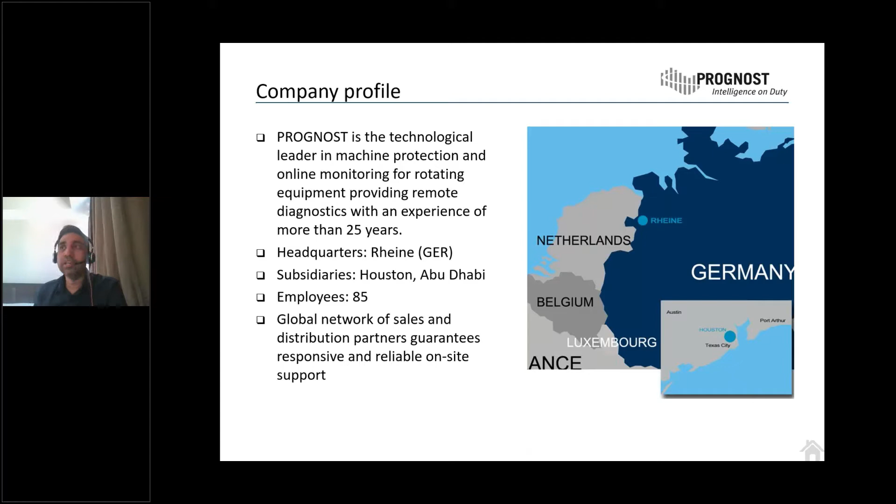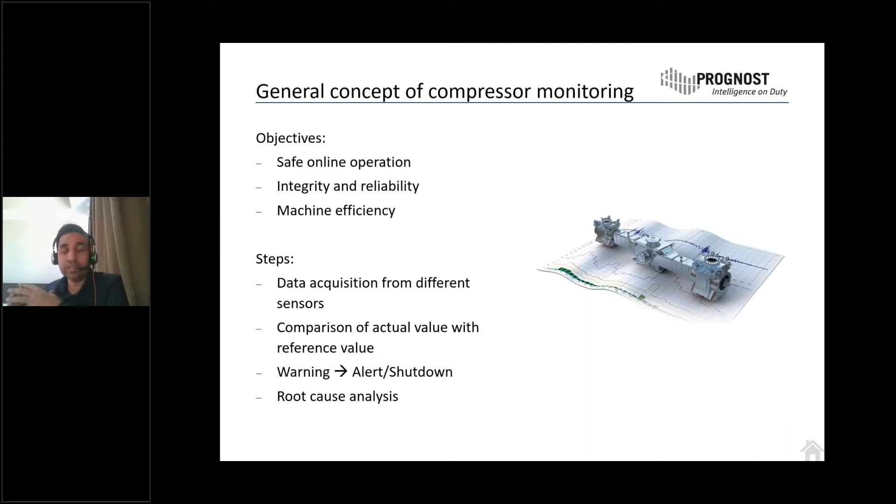In the past, we usually didn't give much importance to recip monitoring. I've seen a lot of plants in Canada or globally where people just say, okay, putting one sensor on the frame vibration helps protect the machine. But this is not true to that extent.

The thing is, you put a velocity sensor on the frame and get a trip—a vibration switch giving a trip. But vibration velocity is the last thing to get influenced when something is going wrong in the crosshead or in the valves. We'll learn this part in later slides, but the point is you may not be able to avoid secondary failure or secondary damage in the machine with the velocity sensor.

You may get a trip, but may not achieve the function of the system. If you're putting a condition monitoring system on your machine with just a vibration switch, you may not be able to avoid secondary damages in the system, and you may not be able to locate exactly where the fault lies in the recip machinery.

People just focus on rotating machines being more important than recip, but at least in the upstream or in plants with services like hydrogen and ethylene, these machines become critical from a safety point of view. So in that case too, you need to put the right system and the right number of sensors on your machines.

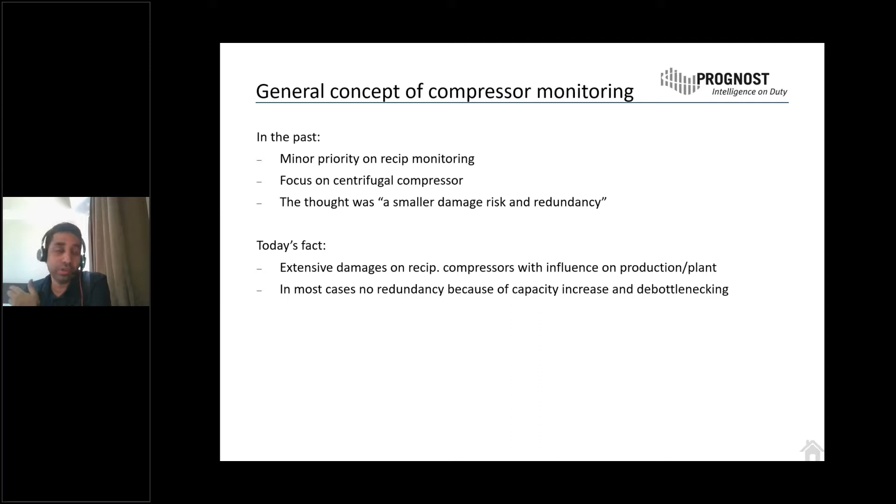But people are getting more aware, and they're trying to put sensors at the right location, taking advantage of the technology existing in the industry. And sometimes when you don't have redundancy in the system, you're also putting a condition monitoring or safety system on your machines.

So here we're talking about the three-concept theory of the MMS system you may use in your plant: a protection system, and the protection system further provides data to the condition monitoring software. And now with emerging technology, you do auto diagnostics on that particular data, like machine learning, AI algorithms, digital twin—all of this you can do on the data if you have it.

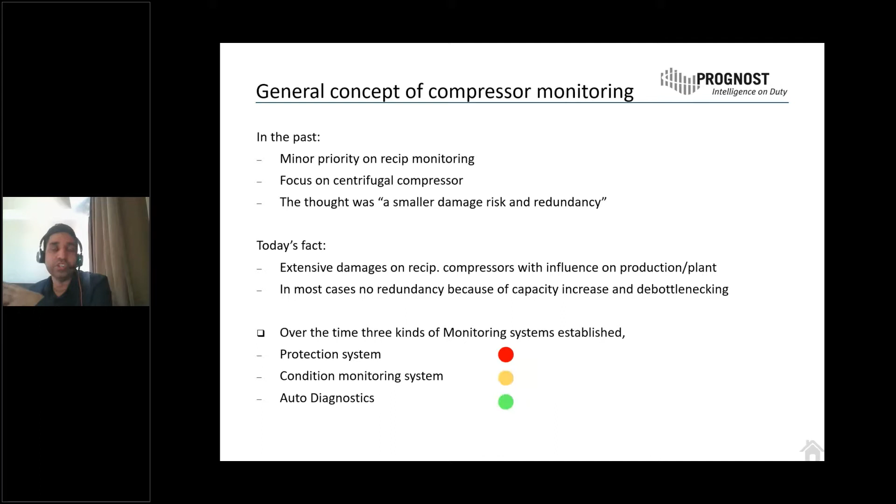But if you don't have correct data, you can't achieve either condition monitoring or auto diagnostic functionality. You may trip the machine, you may protect it, but at least you're not able to achieve the function of doing root cause analysis to understand what's going on in the system.

So coming to this concept of condition monitoring: one part is a protection rack, which you use as a data acquisition system. The sensor is placed on the machine, and these sensors give the signal to the input card integrated in this rack. This rack performs the tripping functionality or safety system.

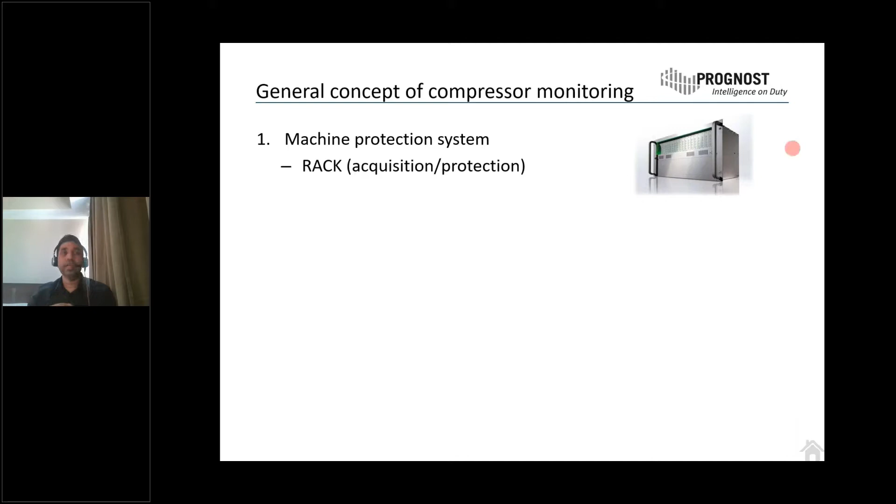And then this safety system further gives a stream of data to the condition monitoring software. This software will process the data, and you apply different algorithms and statistics to give tools to analyze the data in an effective way.

After that, in this software, we now have machine learning algorithms. So you just put the system on your machine, make the machine learn, and subsequently all the work would be done by the system itself.

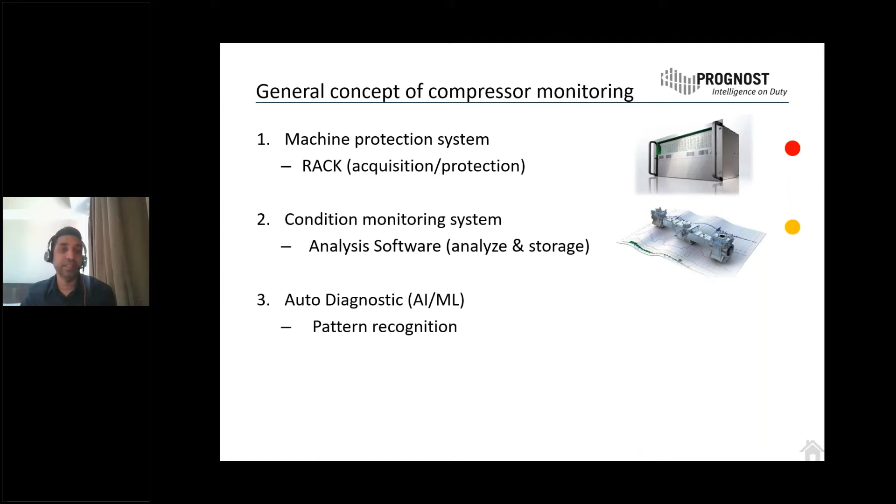In the Prognost system, we call it pattern recognition—whenever there's a situation where you've had a failure in the past, the system will recognize this failure and will notify you beforehand with a probability.

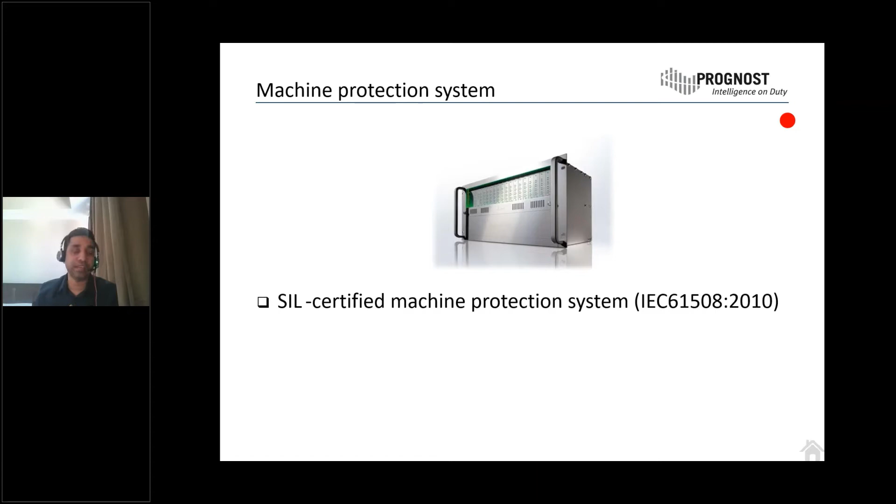This is the rack, and the rack should be certified. In some industries, we call it SIL 1, SIL 2, SIL 3 - whichever certification of the SIL you want to put in, as per your standards or as per IEC standards. Then the system will issue you a shutdown, alert, or unsafe.

Basically, when we talk about SIL, what exactly does SIL mean in brief? Maybe some of you in the presentation already know what SIL is, but I just want to give you a brief introduction. So SIL is Safety Integrity Level.

It means like if I have a sensor on the machine, and this sensor is connected to a wire, and then this wire goes to the junction box, and from the junction box it goes to the connectors and then connected to the data acquisition rack. From the data acquisition rack there is a data acquisition card, and then from the data acquisition card it goes to the protection card. This is the flow of the signal from the sensor to the protection card, which ultimately trips the machine.

So the basic aim of SIL is that the system should be capable enough to detect any loop issue or connection issue in the complete signal line, so that the system does not trip due to a false alarm condition. Instead, the system will issue you an unsafe signal.

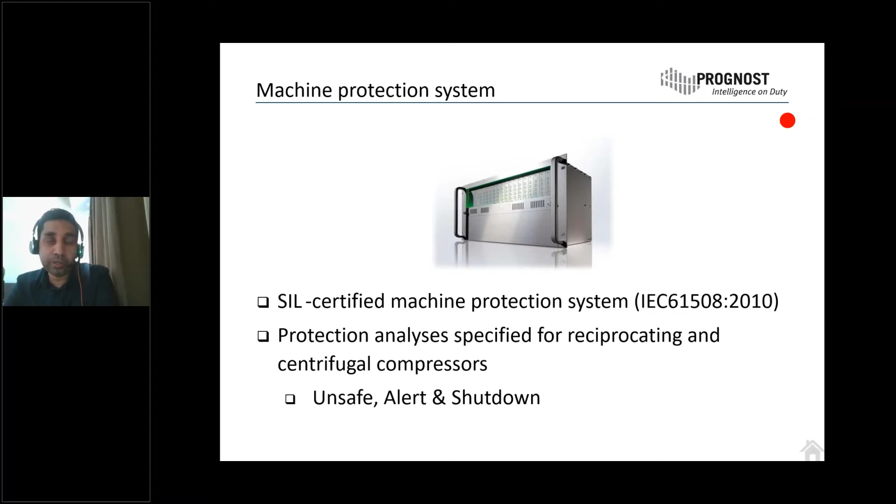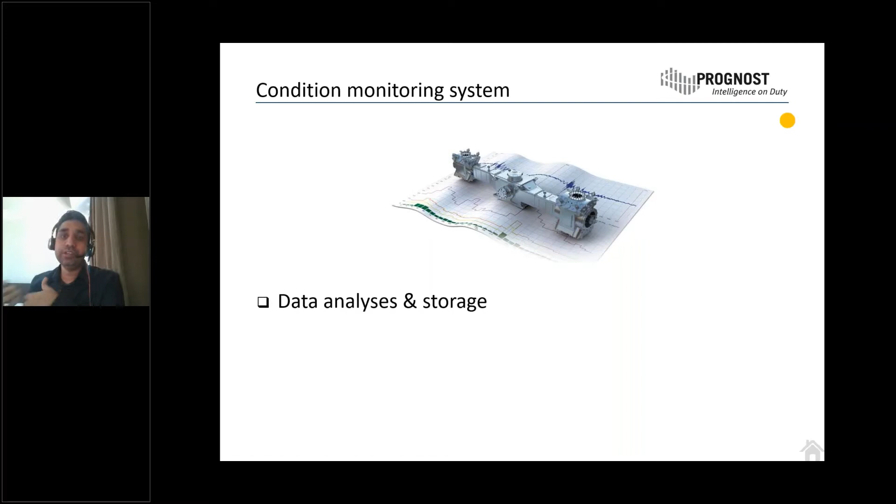Then it comes to the condition monitoring software. The stream from the data acquisition rack goes to the software where you have all the processing. You will do online signal analysis, trending, waterfall plots, early failure detection, wear and performance monitoring, putting an alarm and getting an alarm history.

Then you have a transient plot - some people call it transient, we call it a ring buffer. So you get all these plots in the software. But basically, if you get the right signal with the right sampling rate from the sensor, then only will you be able to do all this stuff.

So the first and foremost thing is putting the right sensor at the right position, and with the right sampling rate you capture or digitize the data, and that digitized data is further processed to get all these plots. Further to that, you will put your thresholds - that is software alarms - and subsequently you will get root cause analysis or early failure detection of the system.

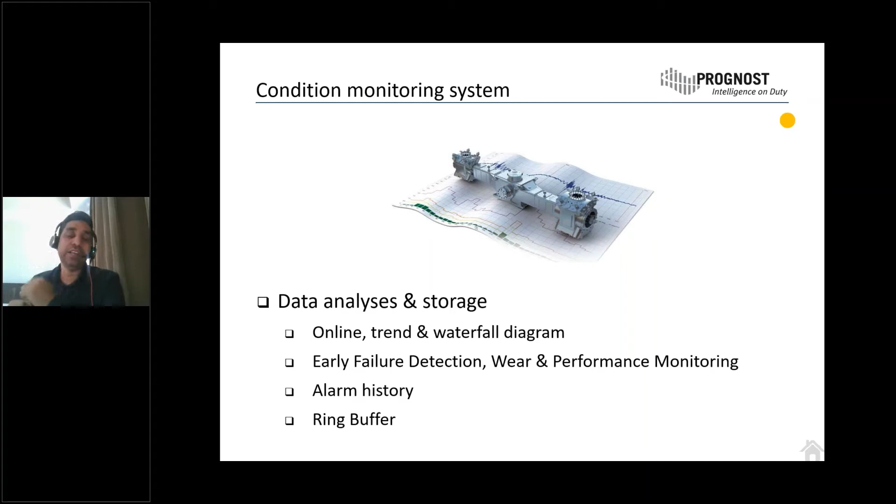Then one step ahead of this is artificial intelligence and machine learning. You make the machine or system learn about the failures you had - we also have a library of failures in our system. And when you have a pattern which resembles a failure in that library, the system will issue you a text message, giving you a notification with the probability of that particular fault.

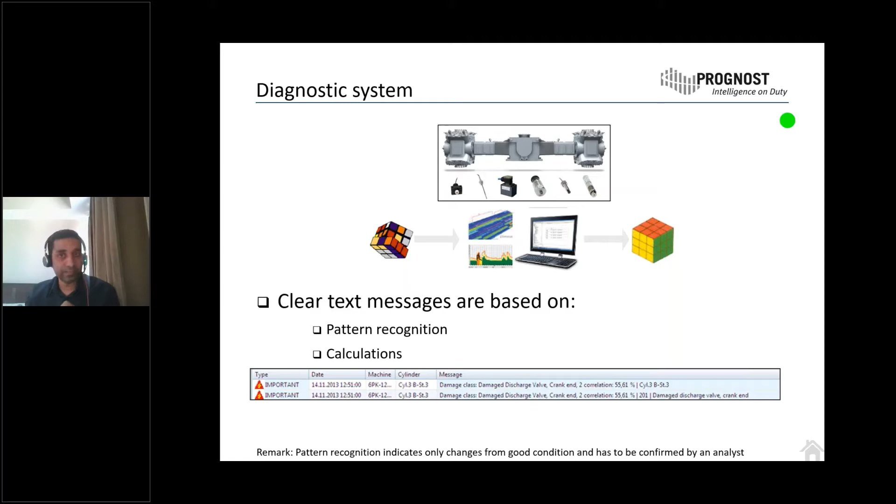Like in this example, it says there's a discharge valve issue on the crank end with a correlation of 55.61%. Definitely, these are helping tools, but ultimately you need to look into the complete system. It will guide you, give you the direction - here you have 55% probability, meaning yes, there's a chance that this fault exists, and then you need to dig into more details.

How does the vibration behavior look, how does the signal look, is the valve opening and closing at the correct time or not? Only then will you be able to get this statement verified.

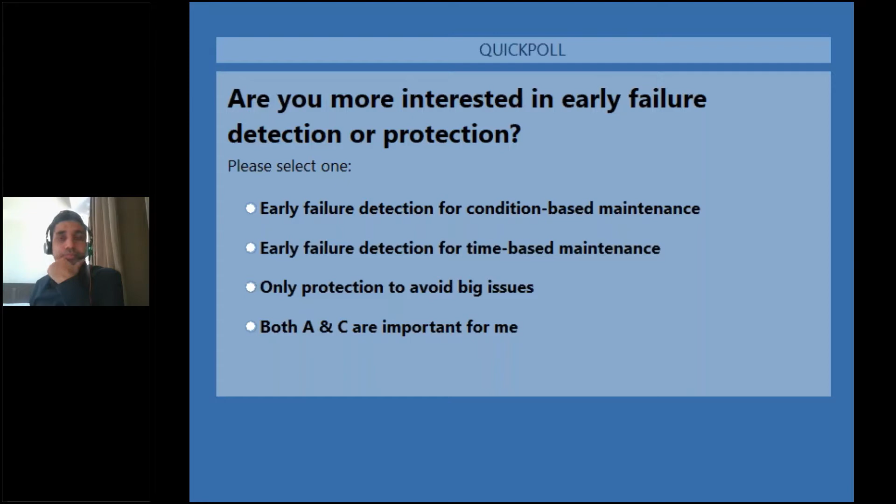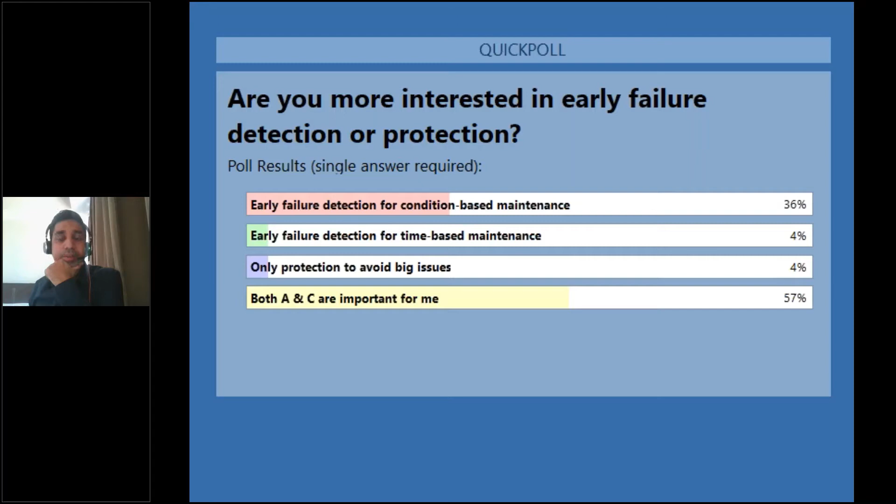Okay, we're going to shut it down here. I'm going to see what our results are. Share. Okay, so 36% are looking for early failure detection for condition-based maintenance, only 4% for time-based, and 4% for only protection, and 57% said A and C. So it seems like condition-based maintenance is getting quite popular.

Yeah, I think it is both, like as you said, 57%. So you put a protection on some of the sensors, and then further on processing the signals to get early failure detection on the condition-based maintenance. And I think that's the right way to approach for any CMMS system. Definitely you look into the other parts as well, that how critical the machine is, and whether it's a single line, you have a redundant machine, or what service it has been equipped with.

Okay, no problem. So coming back to the concept of compressor monitoring, there are different sensors that we use to do the protection as well as the early failure detection. We will see which sensor we basically use for protection and which for condition monitoring.

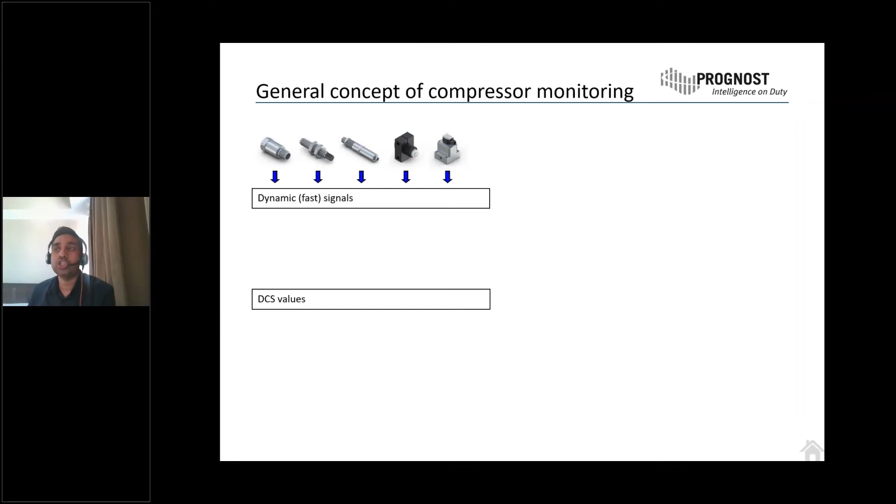Like in this case, for the dynamic signals coming from the speed, frame vibration, rod position, crosshead, and motor vibration is basically used for the protection of the machine.

Okay, and the sensor which is used in the DCS, which is going directly to the DCS, are sometimes knockout level of knockout drum, lube oil pressure, which is an API requirement, then pressure and temperature, interstage pressure and temperature. In some cases, people use different philosophy in the DCS to trip the machine.

But from the perspective of a condition monitoring system or a vibration monitoring system, rod position, crosshead vibration, frame vibration are basically used for the protection of the machine.

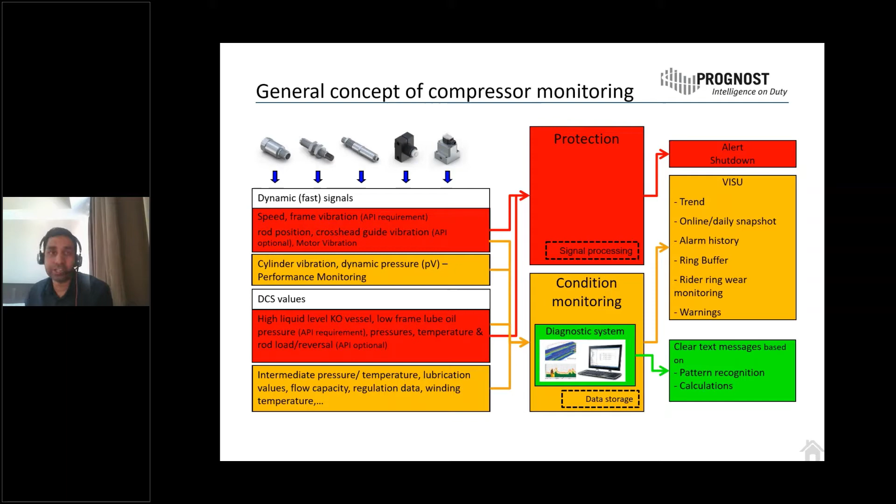Okay, and cylinder vibration, dynamic pressure for the performance monitoring are being used, and these are the sensors that are used for the condition monitoring as well. So the red ones here you see are more like protection signals, and the yellow ones are more like used for the performance and condition monitoring.

Okay, subsequently you club them together and do the analysis, and you can plot trend, online alarms, rider ring monitoring, a lot of other stuff you can do from these signals. But basically the rod position, crosshead, and frame are the three important ones used to trip, and cylinder vibration and dynamic pressure is for the performance and condition monitoring thing.

It doesn't mean that rod position and crosshead don't participate in condition monitoring, it's just only to distinguish between these different sensors, to know which are my protection loops and which are my condition monitoring loops. Okay, frame vibration was an API requirement and is an API requirement currently, but from the fifth version of API 670, crosshead and rod position are also part of the protection logic as an optional sensor.

But in the coming slide, I'll explain why these sensors are important. Apart from the frame vibration, which is the general concept in the industry right now, that if I can use frame vibration, I can do a lot of things - but I'll show you these things in the later coming slides. Okay.

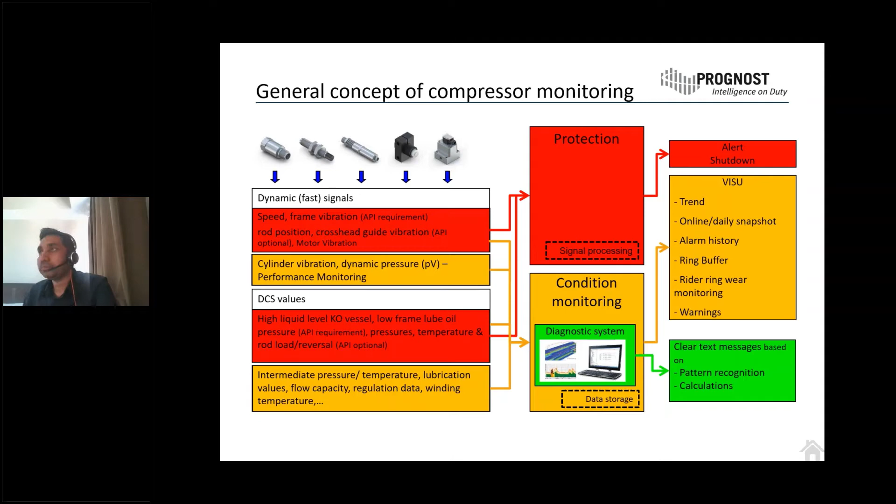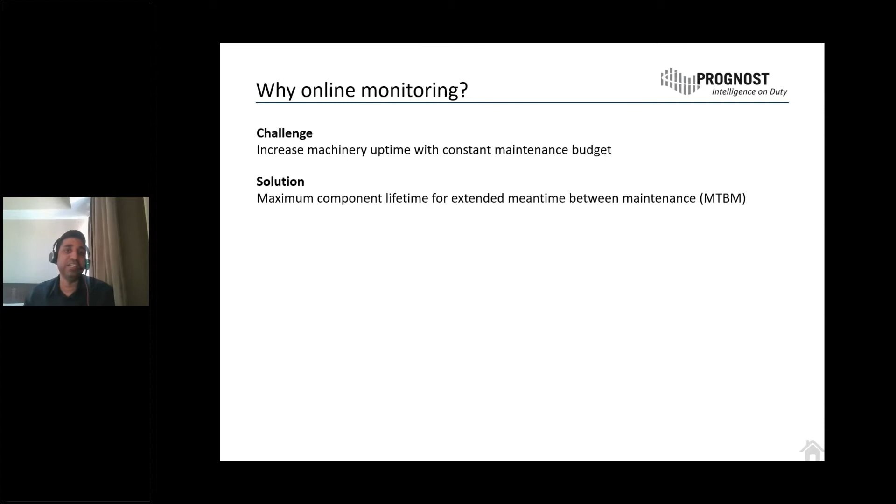So here is a basic challenge in the industry: how can we reduce the maintenance budget and increase the efficiency of the machine. This is a challenge in front of every reliability engineer. So what is the solution to increase the mean time between maintenance? You need to find the weakest links in the chain.

So in reciprocating machinery, valves are the weakest link in the chain. If you're able to monitor and detect an issue in the valves, you may be able to achieve this or increase the mean time between maintenance. But coming to that point, frame vibration alone will not help you achieve this goal, because valve failures are more like impacts, and these are high frequencies.

If you are putting a velocity sensor on the frame, you will get a trip only when you have a significant issue on the machine. You will get this response on the velocity at a very later stage. By that time, your valves are totally damaged.

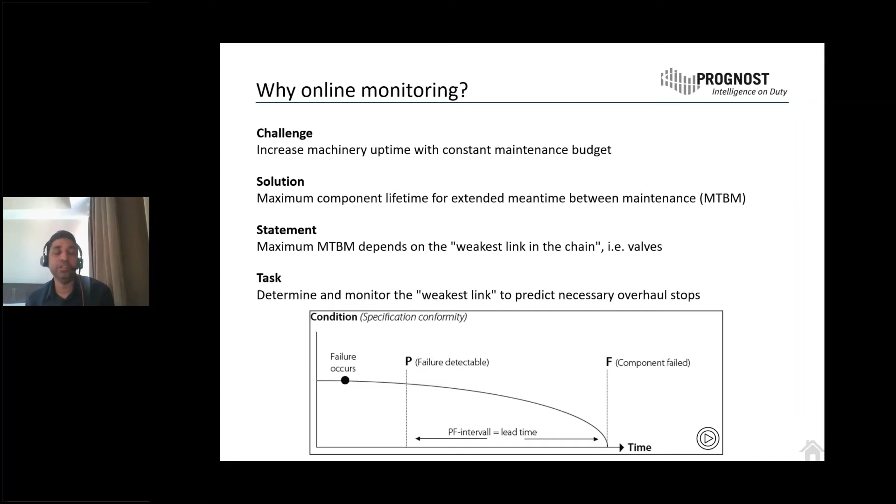So coming to this slide again, if you are able to diagnose the issue on the valves, you'll be able to increase your PF interval, the lead time. I will have some examples of how you can achieve that. But ultimately, if you have correct positioning of the sensor and correct sensors in place, you will definitely be able to achieve this.

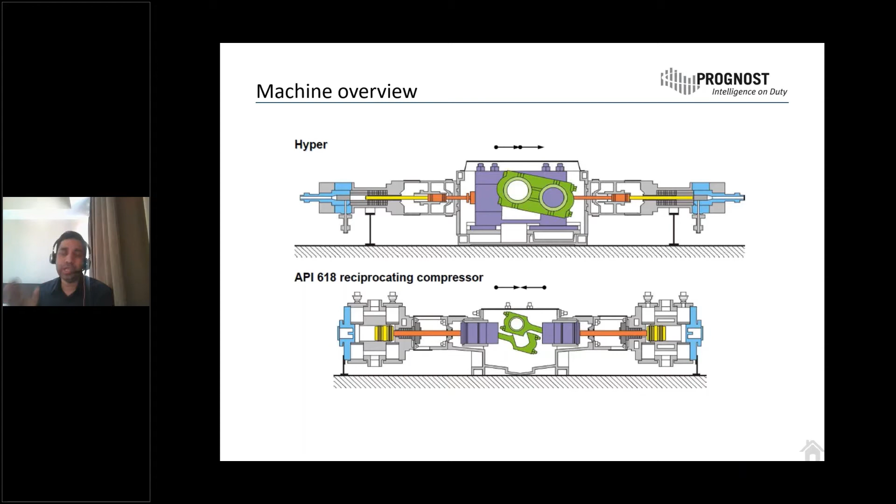Most of the industry in this region, or at least in Canada, has all API 618 compressors. I think only one or two plants in Canada have a hyper compressor for ethylene service producing polymer, but not much. In most cases it's an API 618 compressor, so we are focusing here mostly on this, which is a horizontal type of design.

These are the basic components, and we need to place sensors so that all these components are monitored by the system. This is the actual aim: if you have piston bands or rider bands, packing, cylinder, valves, crosshead, connecting rod, bearings, connecting rod bearing, crosshead bearing, or crankshaft bearing, we need to monitor all these components before they go into a secondary failure mode or a catastrophic failure.

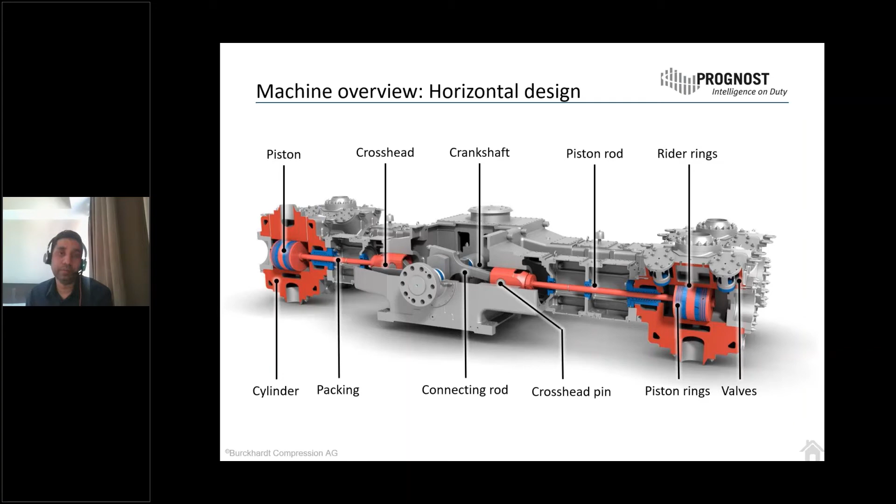We don't want to wait for the system to activate a trip on the velocity sensor installed on the frame. So this is the basic objective. Now, to achieve this objective, we need to place specific sensors at specific locations.

First and foremost is the crosshead vibration sensor, which is an acceleration sensor. It has to be mounted on the crosshead. As we are not able to retrofit this sensor inside the machine, we try to put it on top of the casing, on the ribs where the crosshead is connected or shoes are connected.

Then comes the cylinder vibration sensor. Again, the placement is important; it has to be placed in the position where it captures the signal or response from each and every valve opening and closing event. Again, this is an acceleration sensor.

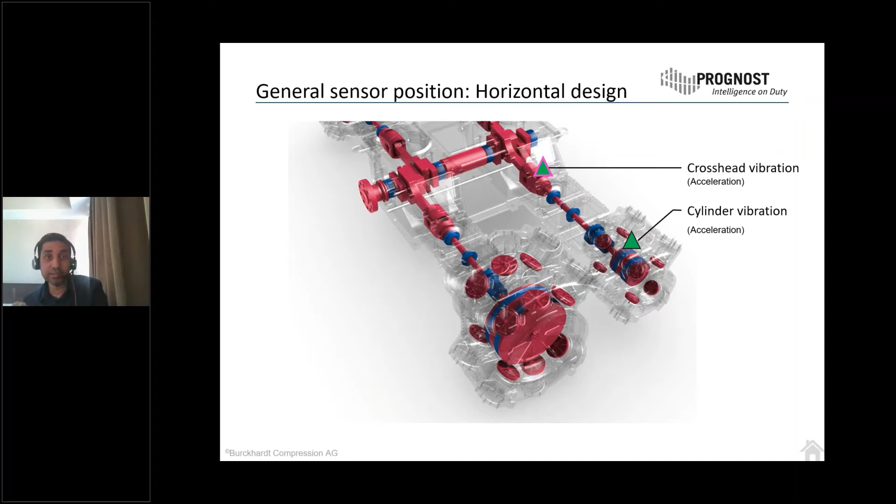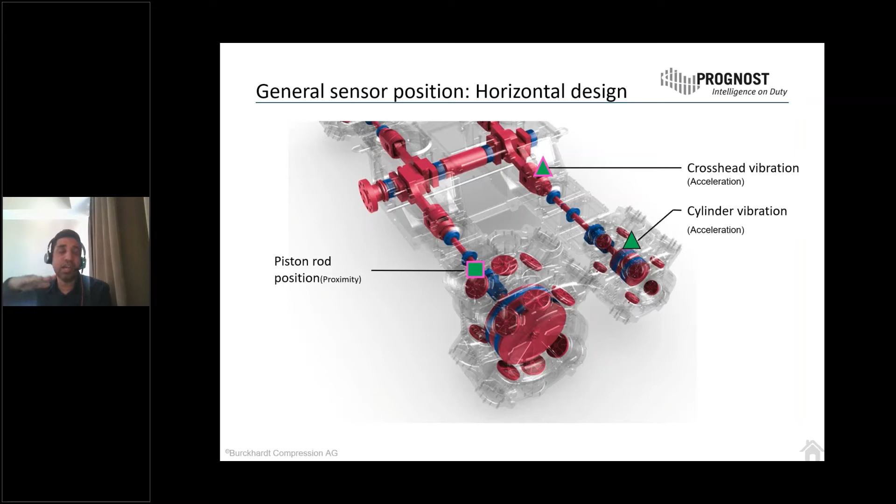Now, a proximity probe monitors the dynamics of the rod as well as the position of the rod. Dynamics is more like vibration, how the shaft rod is moving. Position is how the shaft or rod is going up and down in relation to the reference position.

And not least, the pressure transmitters that are integrated directly into the compression chamber. These are pressure sensors, 4 to 20 milliamp sensors, and they help you plot your PV and PT curves. Then you can draw performance curves as well, like efficiency, volumetric efficiency, suction efficiency, flow balance—all this can be achieved by these sensors.

This is basically for the monitoring of the valves, monitoring of the compression chamber itself, as well as the performance of the machine, how efficient your machine is.

Then you have a trigger sensor, a very important part, because you need to synchronize the signal. It's a time synchronization of all the signals in relation to your trigger signal, so the trigger signal knows what your crank rotation is. When the system knows exactly what the crank rotation is, with the help of cylinder vibration you'll be able to tell the position of the valve opening and closing event. So you need to synchronize all the signals in relation to your trigger signal to perform any type of diagnosis.

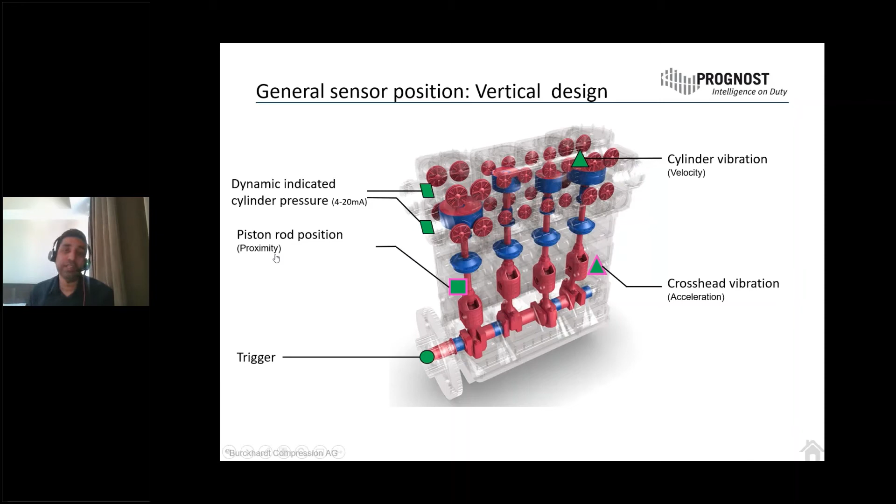So this is a schematic for the vertical machine, same sensors, nothing unusual, just in some cases in a vertical machine you have a proximity probe, and in some cases not. Like in case of Laby, people sometimes try to put a proximity probe and sometimes not, so it's a choice depending on the situation. But this is the same thing in the horizontal, and same way you have a vertical schematic of the sensor location.

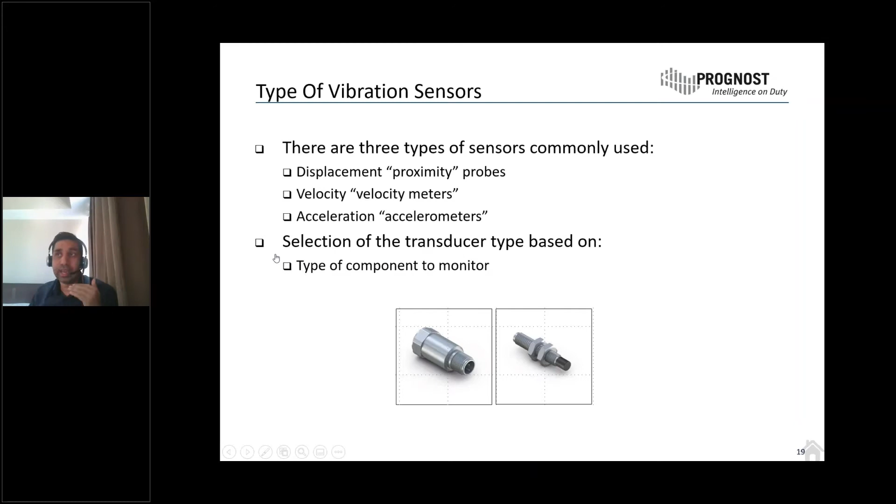Okay, so as I said, there are three types of sensors: one is proximity, another velocity, and acceleration. So what is the difference? Here's the difference, look at the signal type.

From acceleration you get a high frequency signal, from velocity you get a low frequency, and from proximity it is very, very low frequency. So when I say low frequency, what does that mean in this case? When I say a sensor signal cuts off somewhere around 2 to 2.5 kilohertz, it comes into the range of velocity.

And when I say you have an issue with a crosshead, or an issue with the valves, I am talking about high frequency content, somewhere around 5, 7, 8 kilohertz. So these events would not be able to be captured with velocity. It is just a response after the machine is already shaking, and then only are you able to trigger the shutdown from this machine.

So this is really, really important to understand, what you are going to achieve with different types of sensors. Putting an accelerometer on the valves gives you an indication of valve events, not the velocity sensor. Same way, if you have an issue with lubrication on the pin in the crosshead, then you need an acceleration sensor, not velocity. So choose the proper sensor, place it at the right position, and you'll get the result, I'm sure.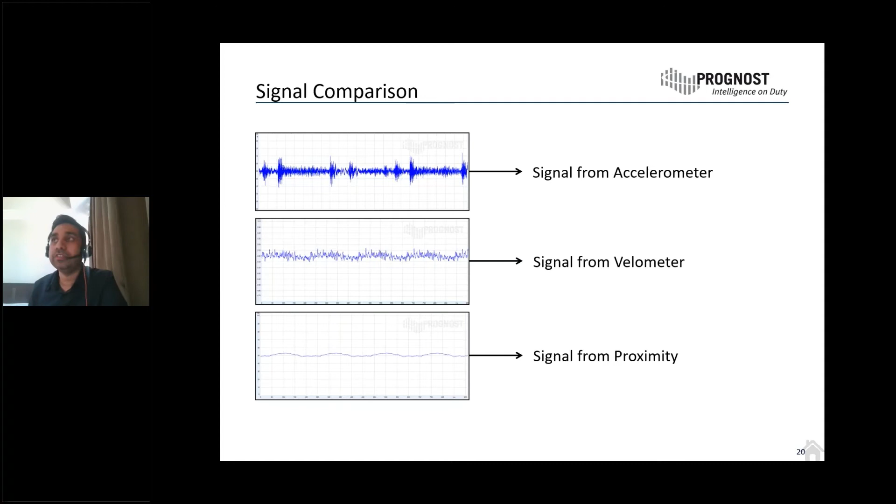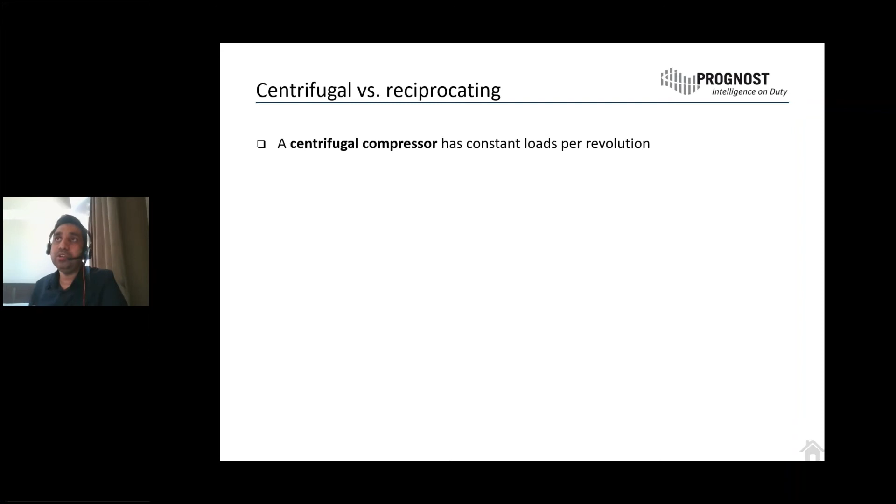So just a comparison between different types of machines and how we usually monitor them. I think everybody knows a centrifugal machine is a constant load machine, so you will see everything in the frequency domain. We know we have a bearing, it has inner race fault, outer race fault, and we know the frequencies where it is coming.

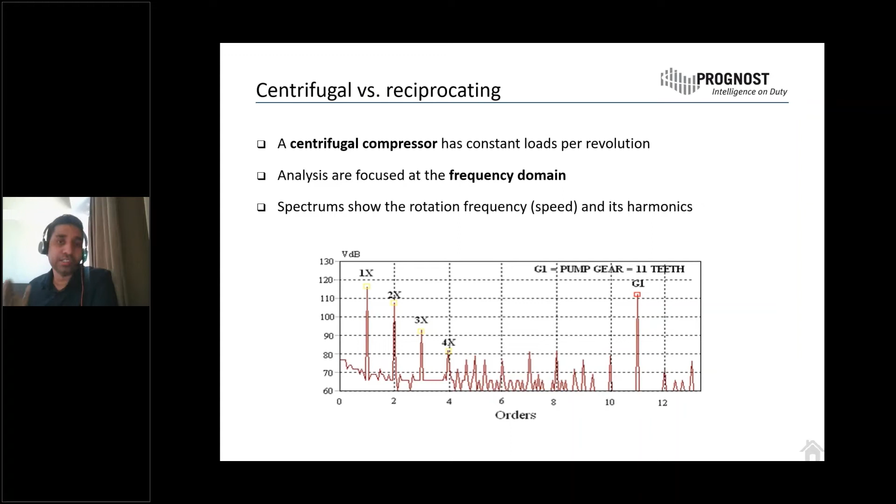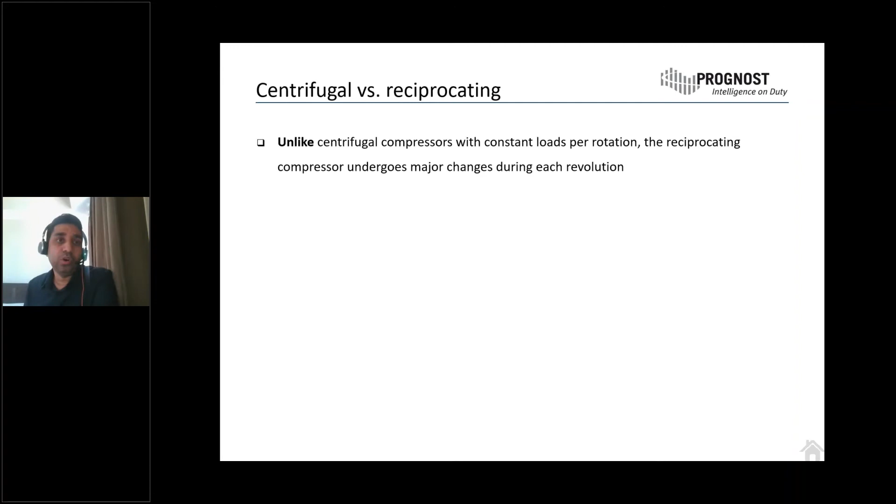But in case of reciprocating, it's not the case. We don't have predefined frequencies where the faults exist, like ball pass or cage frequency. In this case, we need to live with the time domain signal, working only in the time domain, not the frequency domain. So if you are purchasing a system that does FFT and a lot of things, ultimately you'll be able to achieve the result more precisely in the time domain in case of reciprocating machines.

Yeah, in case of centrifugal machines, you'll be able to do a lot of stuff with FFT, fast Fourier transform, half spectrum, full spectrum, a lot of things you can do. But in case of reciprocating, no.

We need to work on the time domain. We're coming to that part as well, how we are doing that. So these are the comparison of these two signals from two different machine types. One is a centrifugal machine, another one a recip machine.

In centrifugal machine, you see the signal is quite sinusoidal and it's quite stable, meaning the load is very stable in one cycle. This is one cycle - we plotted the signal of one rotation. So you see that the load is continuously the same in the complete cycle.

While in case of recip, the load is continuously changing in each rotation. So in one rotation, you have a tension, and in the same rotation, you have a compression loading on the machine. That's why it is good to plot and see time domain than the frequency domain. And when you plot your pressure curves in this time domain signal in relationship to the trigger sensor, you'll be able to know the correct positioning of your valve opening and closing events.

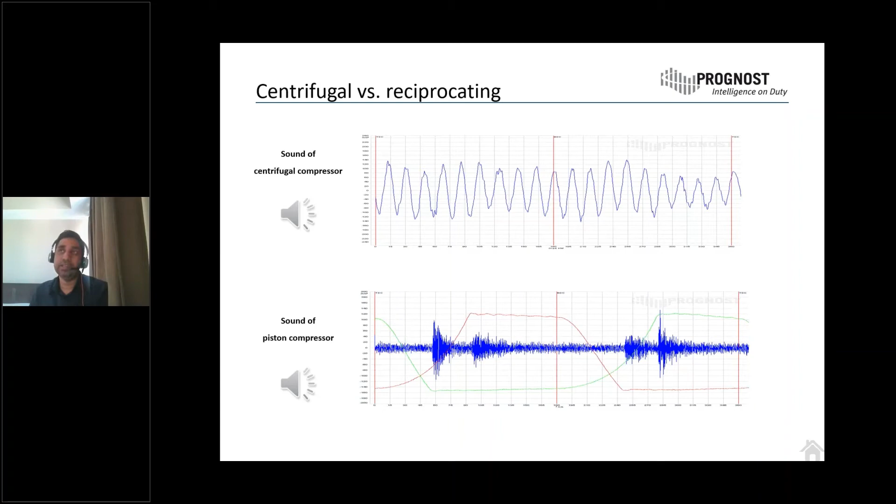There's an example coming up, it's an issue of the crosshead pin. This is a good situation of the signal - signal looks normal, no increase in the vibration, continuously the same. And when they have a high vibration, it appears to be too much of vibration increase at different crank angle.

But if you plot this signal and this signal in FFT, you may see there is a slight increase in the vibration in high frequency region, but you'll not be able to get an alarm at right time. While if you compare only the time signal in relationship to the bad condition, you will definitely be able to see the deviation in the signal.

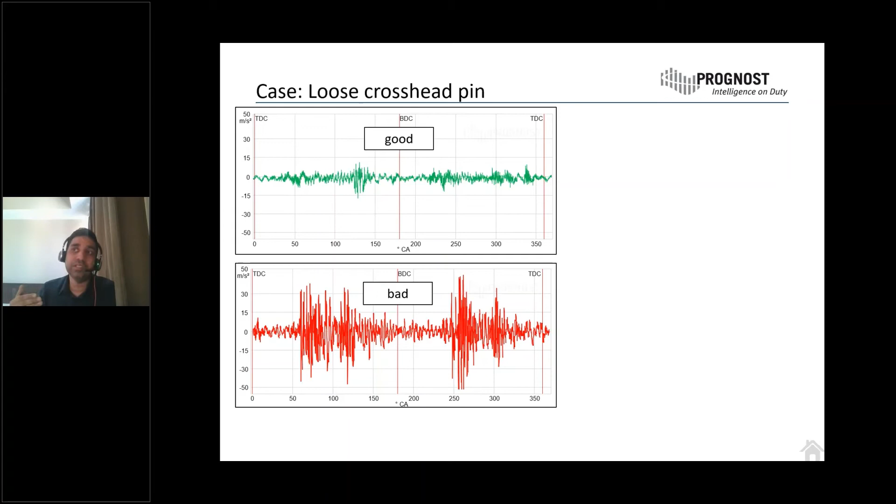The reason being, when you plot an FFT, you average out the signal and you do the overall vibration measurement if you are plotting a trend, right? When you plot an overall vibration, in this situation, you may get a bit increase, but there are some situations when you don't even see there is a major increase in the trend behavior. So if you compare the time signal with a good situation and bad situation, you'll be able to find out much more than just plotting an overall vibration or an FFT.

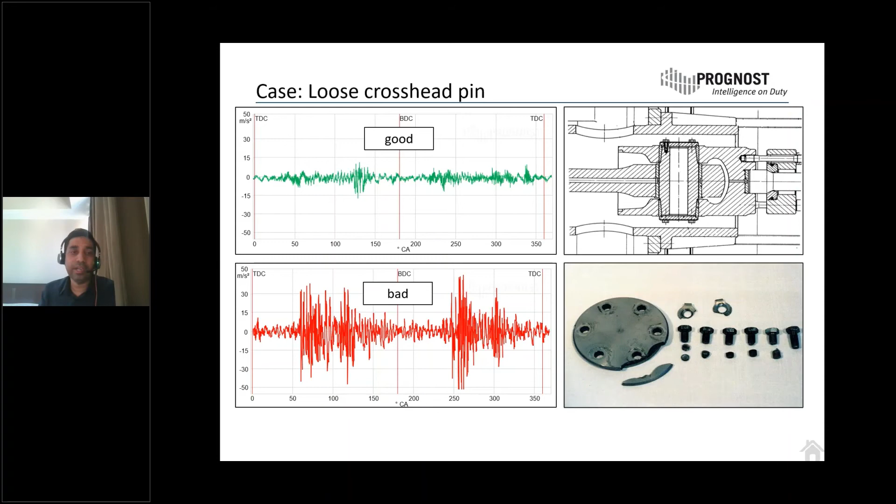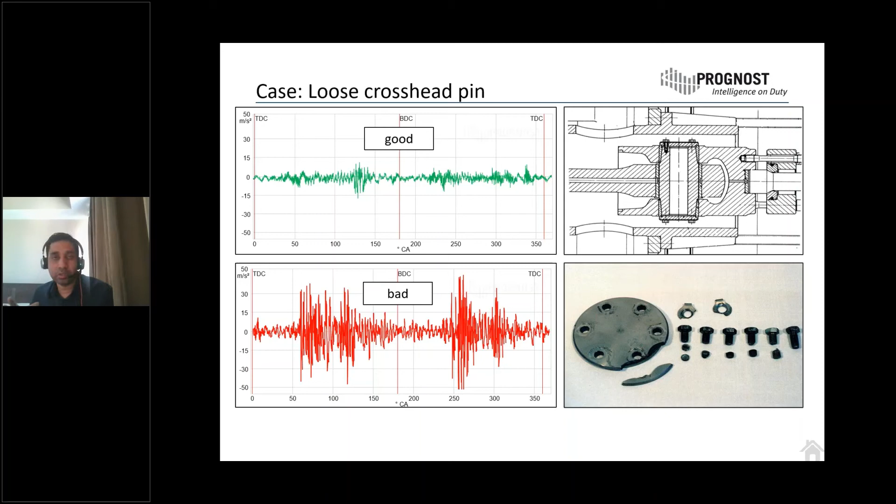So in this case, this is a crosshead pin issue. There is a high vibration, machine got tripped, and during inspection, they find out that they have the plate holding down - this one has been cracked, right? There is a complete story behind, but because of the time, I'm trying to make it fast. So this is the situation. Again, focus on the time signal, than the frequency domain.

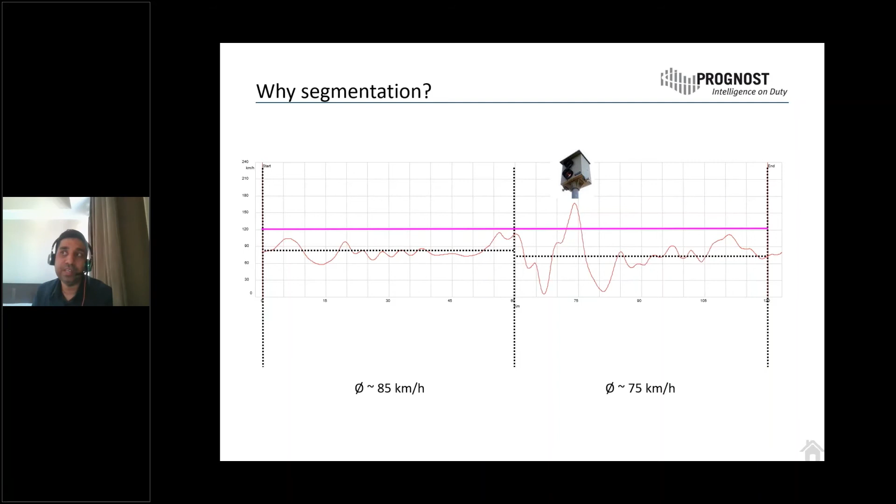Now imagine if I split this signal, not averaging up, and splitting the signal in different portions, I will see that at one point, this vibration exceeds the threshold or exceeds the trip limit, right? And with the experience we have, 25, we saw that this philosophy works perfectly, and you can avoid a catastrophic failure in the machine, because it is more toward a conservative practice for protecting your machine before something goes wrong.

If you are plotting just an overall vibration and trying to trip the machine, you may lose the events. You may not be able to trip the machine like I showed you. If you average the signal, you may not be at that level. And when you have an issue on the crosshead, it is not that high intensity, because we are talking about high frequency. High frequency has a low amplitude, right?

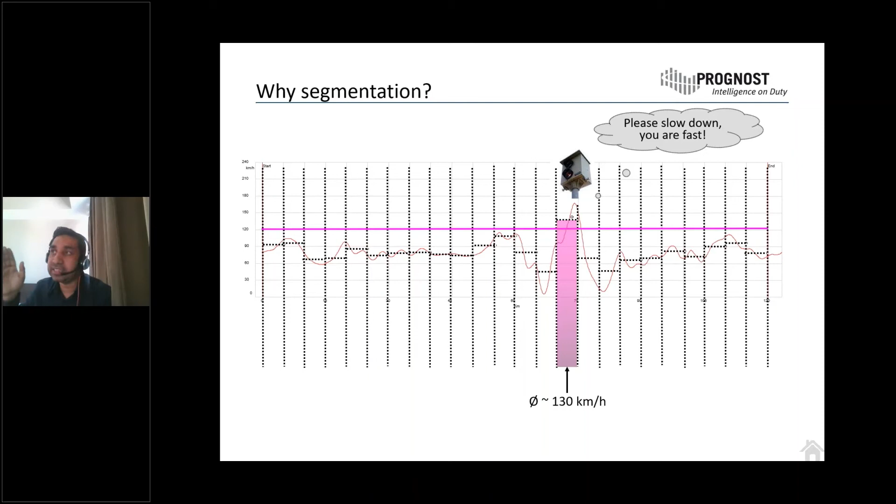So first, to capture the low amplitude signal, and after that putting the right threshold in the right place, this can only be achieved by segmentation analysis. So you divide the complete revolution into 36 segments, and then...

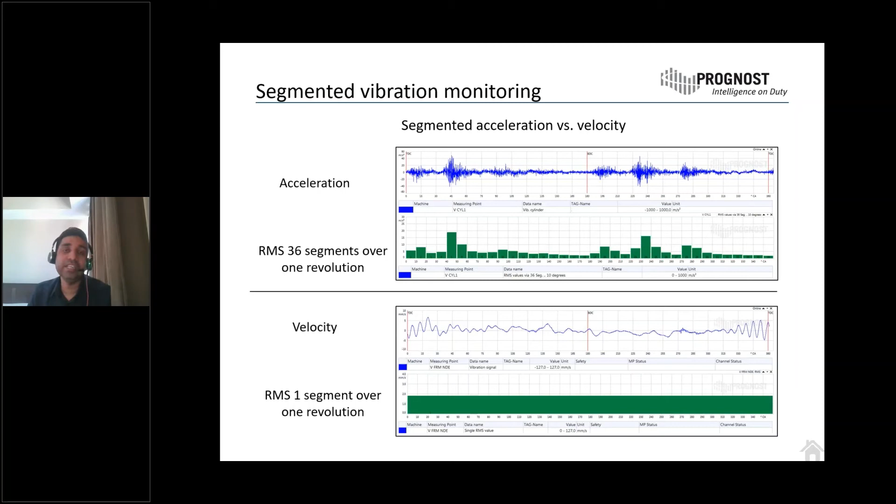In one case you divide the signal, and in another case it's just an overall vibration. In velocity, we never segment, because we know there aren't too many frequencies inside the signal, so we only do the overall. But in case of acceleration, like cylinder vibration and crosshead vibration, we do the segmentation, dividing the signal into 36 individual parts, and each part has its own intensity.

On that we put the thresholds: first warning, second warning, third warning - these are software based - and last but not least, the protection limit on the machine. So this is how the system works. Every system in the market works differently, but this is how we are doing things.

So it's your choice whether you need to go with the segmented analysis or an overall one. But from my experience, I must say that segmented vibration protects your machine more precisely than the overall monitoring system, putting limits on that.

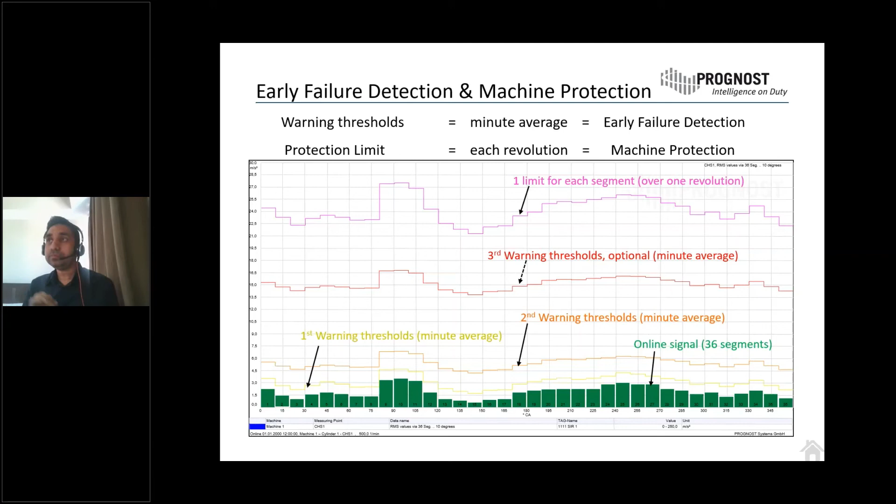Okay, I think we don't have much time, so I'll quickly go to the crosshead vibration. As I said, the crosshead vibration sensor is used to detect mechanical damages on the crosshead, on the bearings, or on the piston rod.

Clearance in the drivetrain - if you have a loose piston nut or loose crosshead itself, cracked crosshead, anything related to the drivetrain in the recip machine would be detected by the acceleration sensor mounted on the crosshead. Loose connection in the pin or piston, or lubrication issues - everything would only be detected by the crosshead sensor.

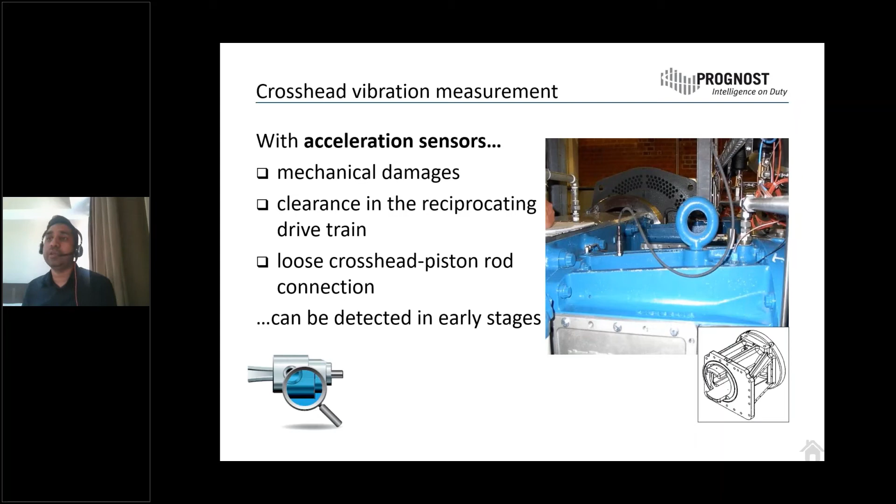So now think about if you are putting an acceleration sensor on the crosshead. This is how we divide the signal into 36 parts, and this is how the signal looks like. These are usually two impacts in an ideal situation.

What are these two impacts? These are the rod reversals. Does everybody know what exactly the rod reversals are? It's the point where the machine, or the piston, experiences a change in the rod from tension to compression.

So if you look at these points, these dots, these are the rod reversal points. And whenever you have high vibration at these points in the crosshead vibration sensor, it means there is an issue with the drivetrain integrity.

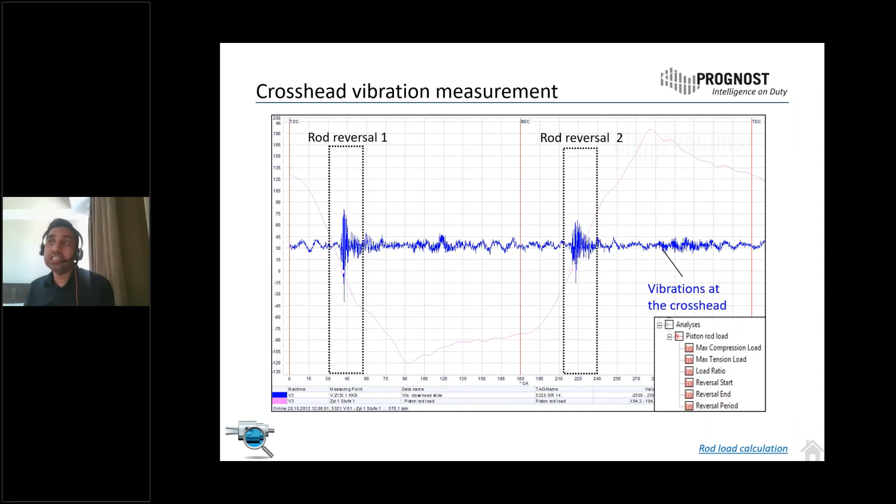Subsequently you can derive other statistics as well, like calculating the compression load, tension load, rod reversal start point, end point, and things like this. You can derive a lot of things, but the basic objective is: if you have high vibration at these points, something is seriously wrong.

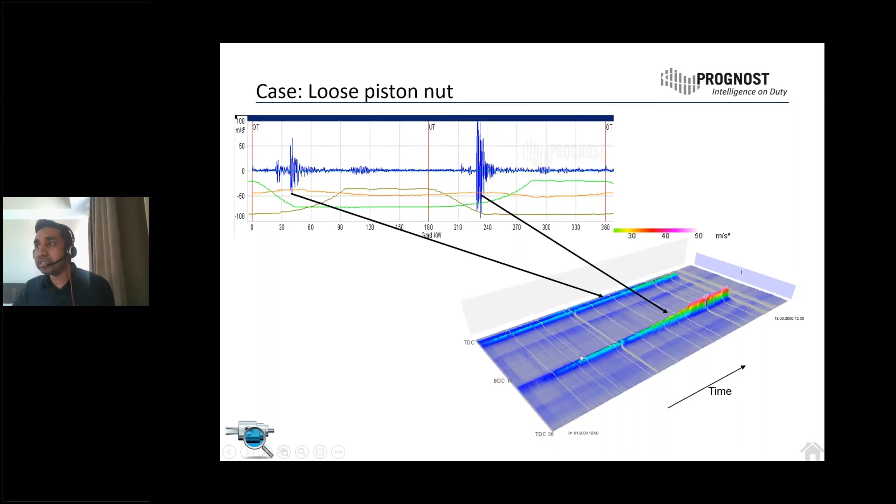Here is an example of a loose piston nut. You see, this is high vibration at the rod reversal points, and it is increasing over time. They had an inspection here - and I think I missed one slide, yeah this one, sorry I skipped the poll - and they found that there is a loose piston nut on this drivetrain.

So going back, you need to monitor these rod reversals. And again, these rod reversals can only be captured with an acceleration sensor, not velocity, because look at this signal - it's approximately 5 to 10 kilohertz. So putting a velocity 2.5 cutoff, it's gone. Your signal is nowhere, you will not see anything, right?

Sorry Andrew, I'm going to skip the polls because we don't have much time.

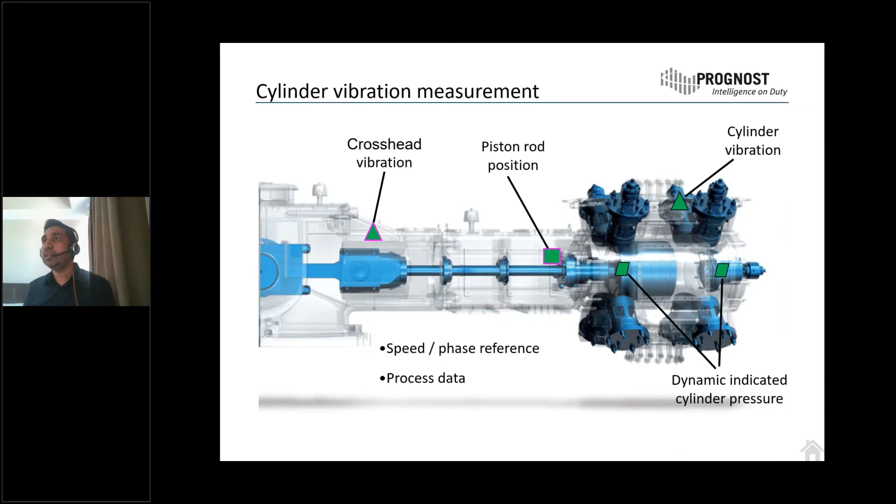So going to the cylinder vibration - again, it's an acceleration sensor placed on the head of the cylinder, and it's used to detect valve impacts, broken plates, valve cage issues, leakages, sticking valves, and things like that. Everything related to the valves would be detected by the acceleration sensor placed on the cylinder.

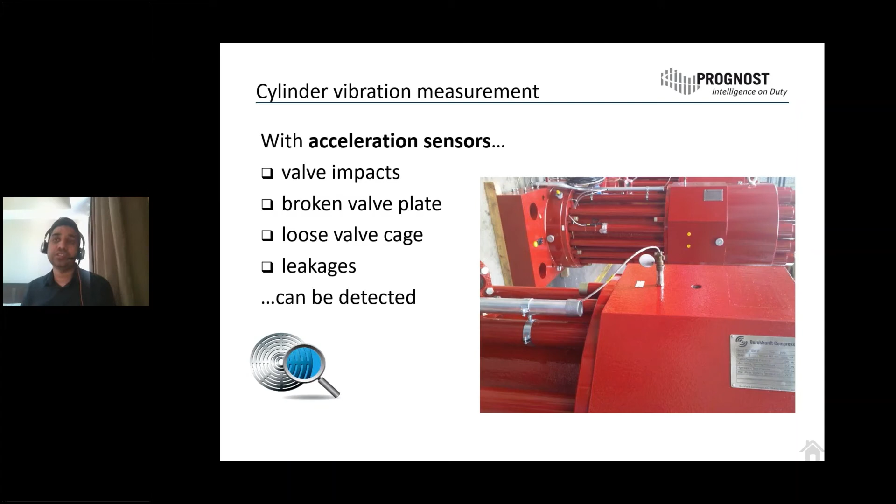Same way, acceleration, but now you see this signal looks totally different than what you saw on the crosshead, right?

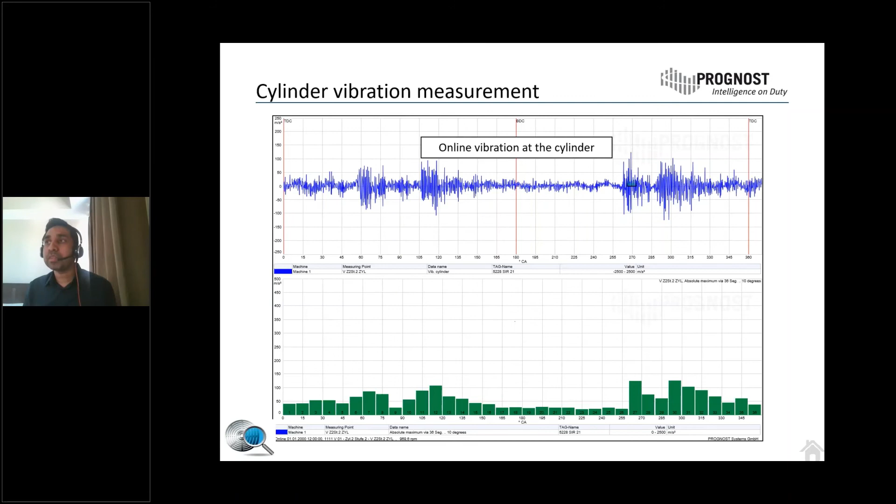Crosshead vibration intensity is lesser, while the cylinder vibration intensity is much higher because of the valve events. These are inherent, meaning it's always there. So we divide this signal into 36 parts, and you see the intensity.

Again, when you plot this vibration signal, cylinder vibration, in relation to the pressure, you see this blue one is head end pressure and red one is crank end pressure. This is cylinder vibration. You'll know where exactly your valve events are.

So in the first case, it's a suction valve head end opening. Then this one is a discharge valve crank end opening. Then here, suction valve head end closing and discharge valve crank end closing. Subsequently, you have the other events in one cycle. When I say one cycle, it is a complete crank rotation of 360 degrees.

When you look into this picture and plot a new picture, imagine this is your good data, and now you have a bad valve, so you will see either high vibration or the positioning of these valve opening and closing events may change. So when you look into the good behavior and bad behavior with this graph in view, you'll be able to diagnose the issues on the valve clearly.

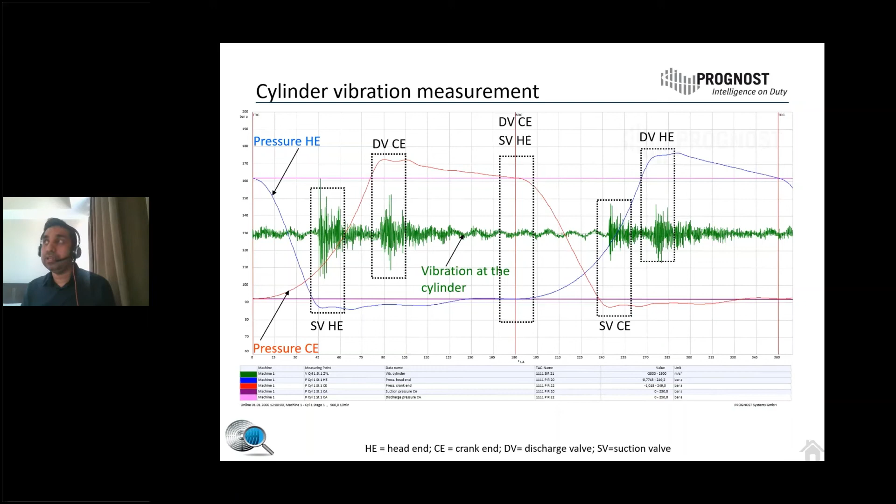Why? When you look into the 3D waterfall plot, it looks like this, and you have high vibration, but after that it goes down. This is an indication that the valve is sticking. There is some moisture in the gas which gets ingress into the valve and forms an emulsion, and it sticks. Over time, with the gas, this emulsion gets washed away into the discharge line and the vibration goes back to normal.

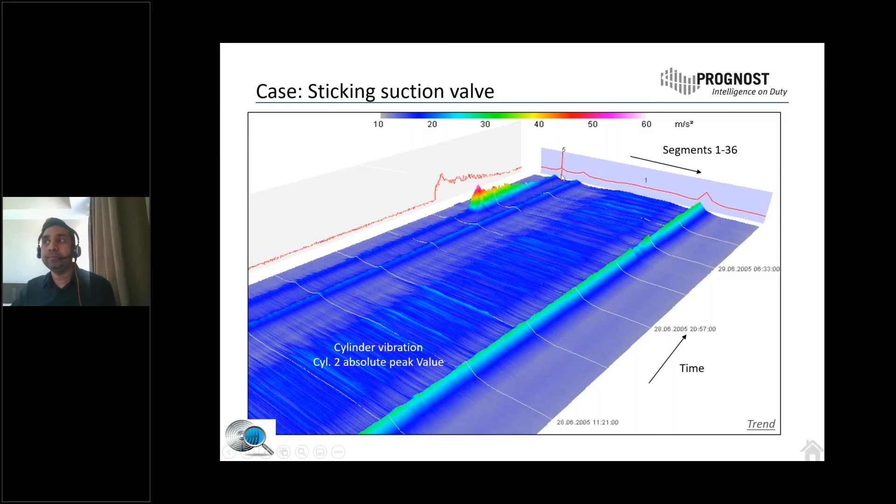But with this curve, you're able to deduce a lot of factors like the situation of the valve - whether it's sticking, whether it's damaged, whether the spring is broken, or maybe the valve is totally destroyed when you have no pumping at all.

So next is your crosshead cylinder piston rod position measurement, which is a proximity probe. Sometimes you put it from the top, from the bottom. If there is any debris or contamination in the cylinder, you'll be able to diagnose that. In hydrogen service, in some cases you have a lot of debris, even moisture, and you need to detect that because moisture may affect your vibration behavior as well as ultimately induce stress on the piston rod, and subsequently you have a crack or broken piston rod. So this can only be achieved by the piston position measurement.

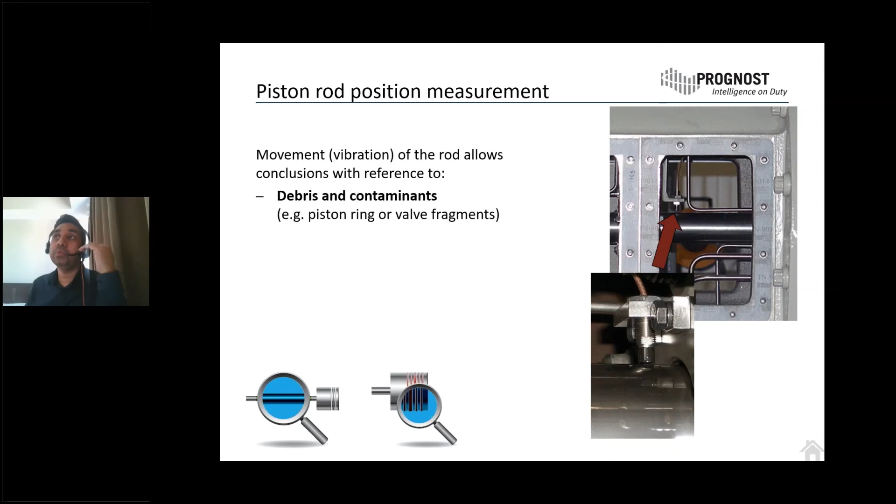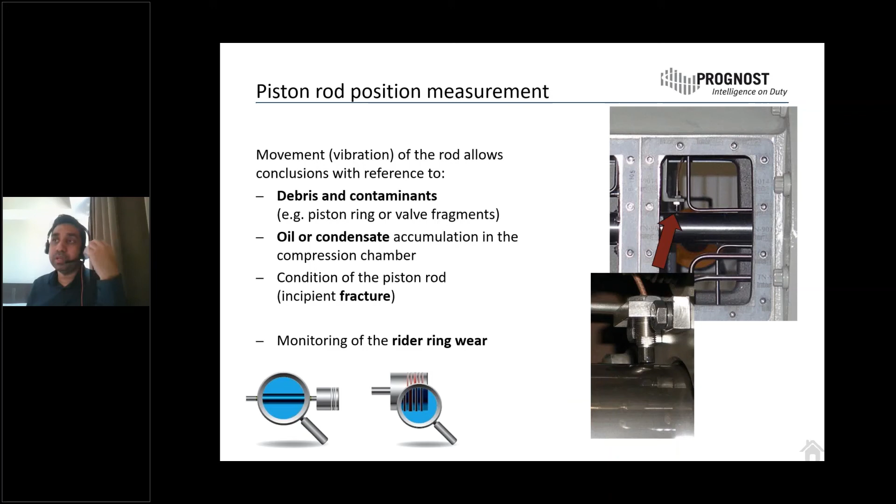Any condensate or accumulation in the chamber, you can diagnose with this one. Condition of the piston rod, yes, and rider rings - people always ask how I can extract the rider ring measurement with the piston rod position sensor.

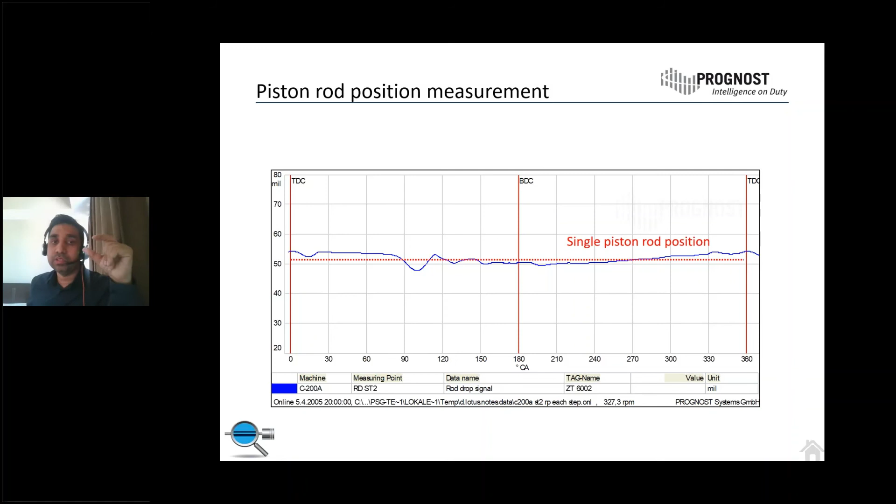If you look at the signal, there are two components associated with it. One is the single piston rod position - this is your DC measurement of that proximity probe, called average position. The second one is your dynamics, like this one. This red dotted line is an average or reference value. This is your DC, and if you look at this signal, it is moving up and down - this is an AC component. It is called dynamic, this is peak to peak. The red one is the DC, which we call rod position, and some people call it rod drop as well.

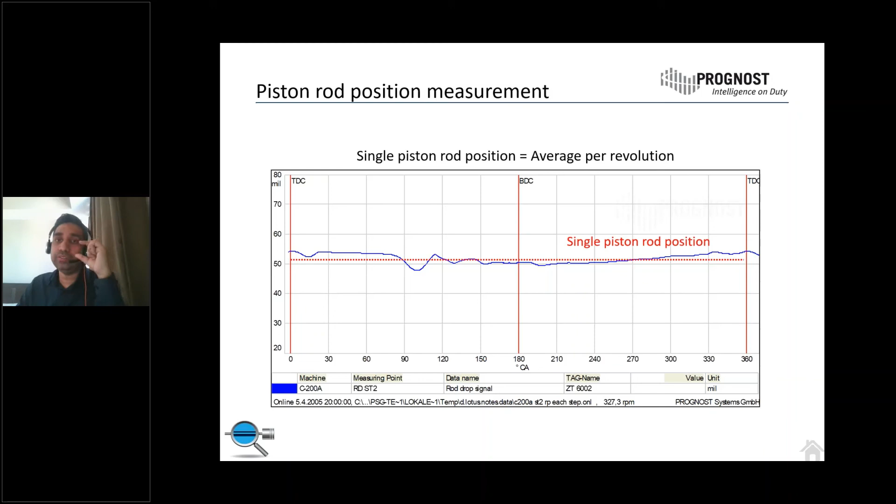Okay, so rod position is one component, and peak to peak is the second component. The machine trips on peak to peak, not on the rod position. So the DC value never trips the machine, only the AC value trips the machine.

Okay, so usually what we do is divide this complete signal into 8 parts. Sometimes customers ask us, okay, we don't need 8 segmentation, we need only one value to trip the machine. That can also be done, but I think doing an 8 segmentation gives you a good indication of what's going on if there is a deviation happening.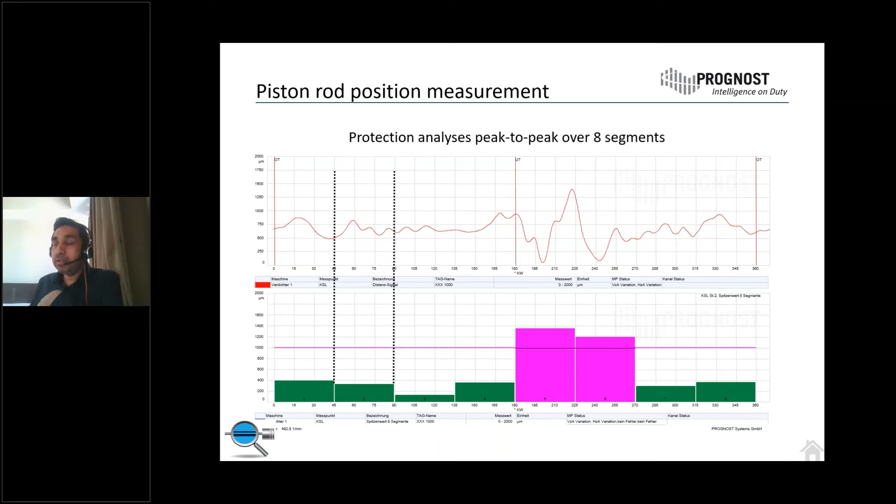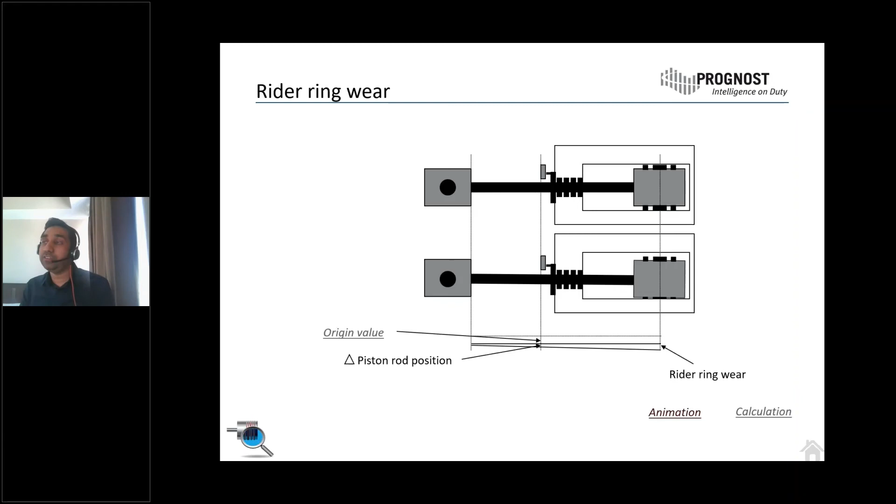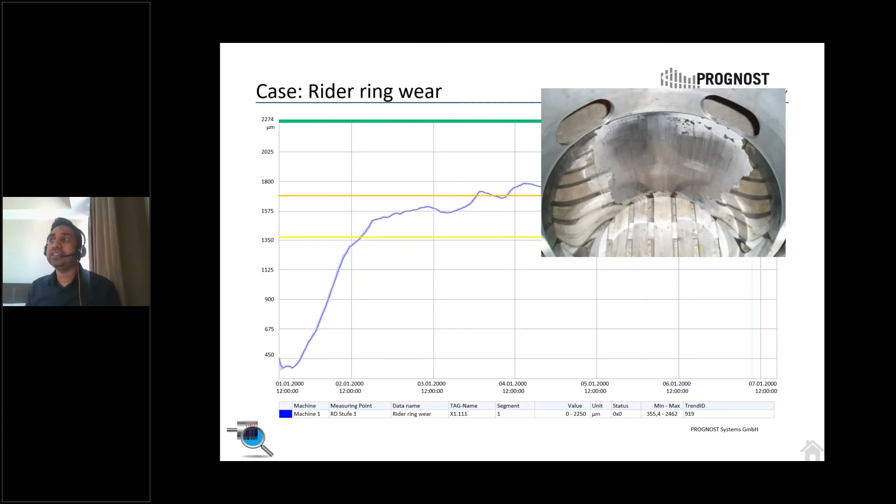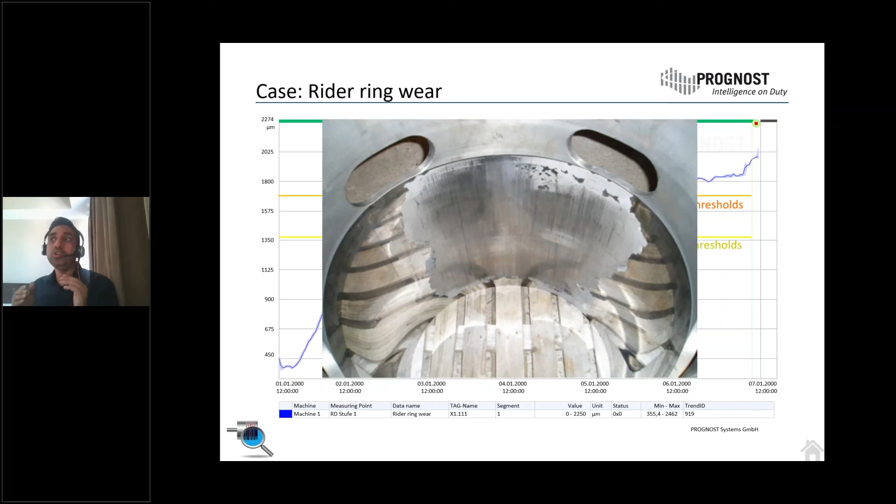Okay, I'm sorry, I'm going too quick because of the timing, but anyways, this is an example. There is a calculation and the rider ring is slowly increasing. Initially it hits the first warning and then second warning, and somebody says, okay, we have something going on in the machine. They shut down the machine and found that they had completely worn the liner off. So it's really important parameter to plot, but it needs to be done in a correct way, like the dimensions of the cylinder should be correctly inputted in the system, and the system should be capable enough to perform these measurements or derive these measurements.

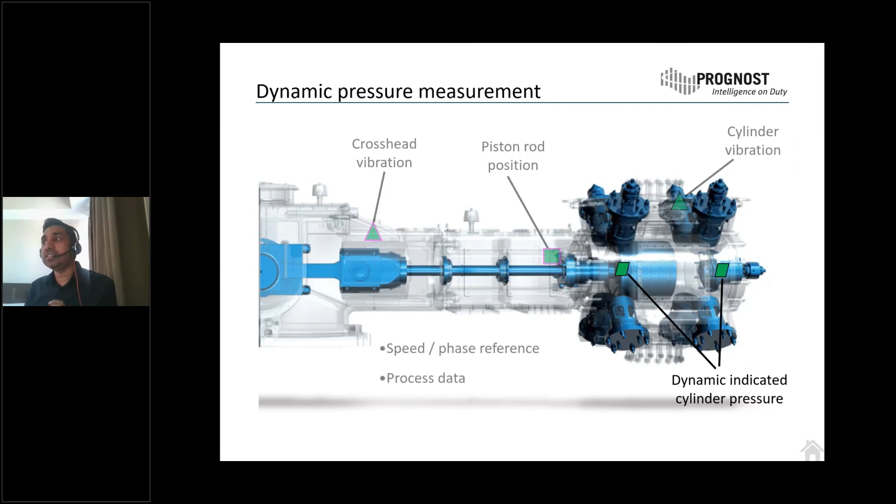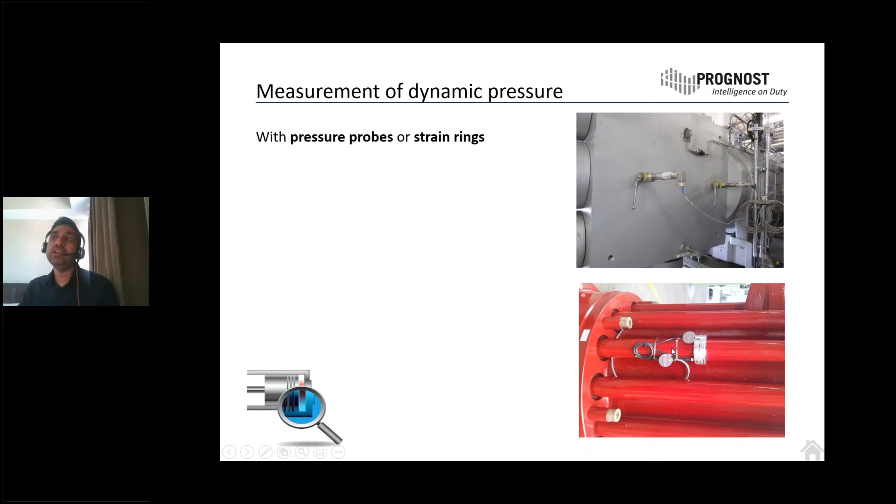Okay, so last but not the least is the pressure transmitters that are integrated to the compression chamber. Like in this case, you have PTs directly integrated to the compression chamber using a Kiene valve. And in some big machines, we also use a strain gauge measurement to derive the pressure signals. So it will help you in detecting the valves, condition of the sealing elements, efficiency or performance, and the clearance pocket unloaders or valve unloaders if it is in place. So if you have valve unloaders, pressure signals are really good parameters to diagnose any abnormality in the unloaders.

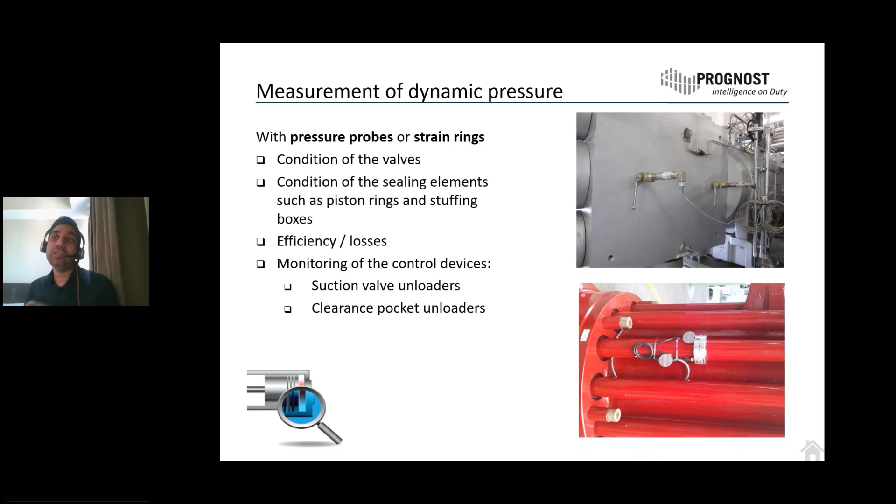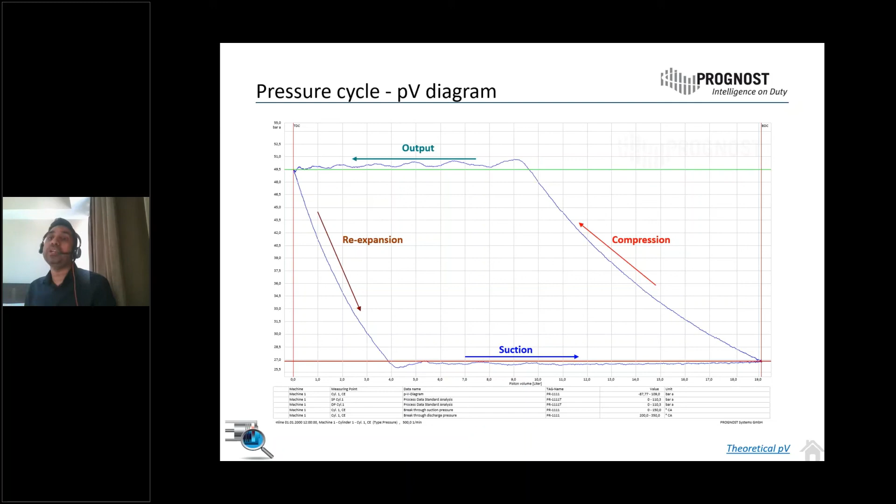And then you have a PV diagram plotted using these sensors. Okay, you have compression, output, re-expansion, and suction. Everybody knows about this curve, but how do we use this plot to diagnose any thermodynamic property of the system. Okay, this is how we can derive parameters from it.

So if you look at this curve, you have polytropic exponent 1 and polytropic exponent 2 in the compression line. Same way you have a polytropic exponent on the re-expansion line, 1 and 2. We plot the slope of these components. These are called... usually we don't have an adiabatic process in any compressor system, so we have some losses. So when you have losses, when it is more than some level, you have a change in the slope of these polytropic exponents, and we need to plot these.

And we put a threshold on these trend lines of the polytropic exponent. Once you have this warning threshold set up on the polytropic exponent, the system will issue an alarm and you will check the symptoms and what's going on, what's the vibration behavior, and what is the efficiency, if there's a decrease in efficiency, or maybe the machine is pumping too much or too little. All of these things you will be able to extract whenever you have an alarm on these polytropic exponents.

Same way, you have breakthrough points. It means where your suction valve is opening, and here where your suction valve is opening, and this one is a discharge valve opening. So these are called breakthrough points. Again, these breakthrough points are specific for each cylinder, right, at what crank angle these breakthrough points should be. If the trend is going up, meaning earlier opening or later opening, it means something is going wrong with the machine.

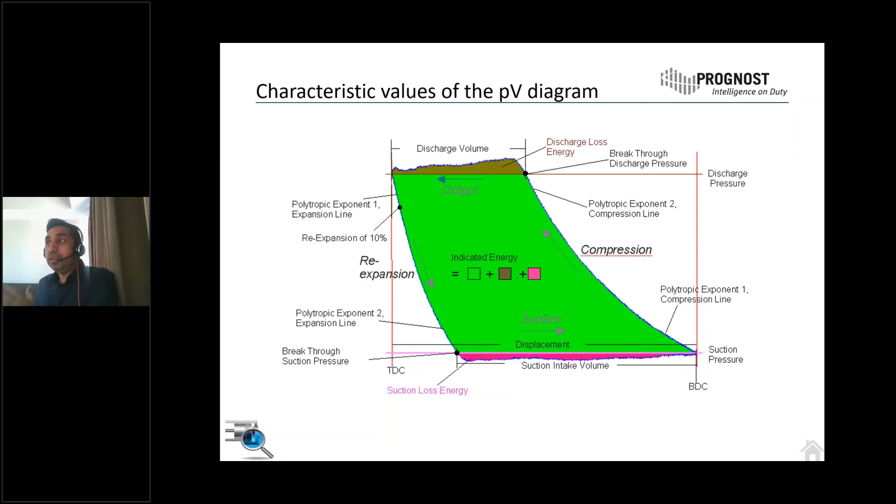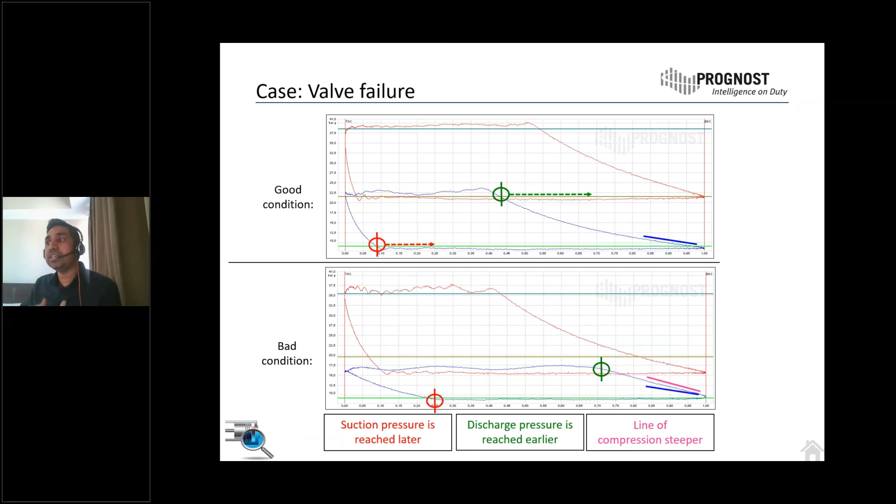So in this case, your discharge valve, this green one, should be open somewhere around 0.45. Here it is opening quite early. While the suction valve should open at this position, it is opening late. So now you need to imagine and think about what's going on, right? Also, your slope is getting steeper compared to the good situation.

So if you can tell me which valve it would be, it is the first stage discharge valve having an issue. Because of this issue, you get gas coming back into the compression chamber, and you're able to achieve the differential pressure to open the discharge valve quite early.

In the other case, similarly, when the gas is coming in, you are not able to achieve suction at the right time, and the suction gas passes by the discharge valve, so you are not able to achieve the differential pressure to open the suction valve at the right time. So here you have a leakage in the discharge valve.

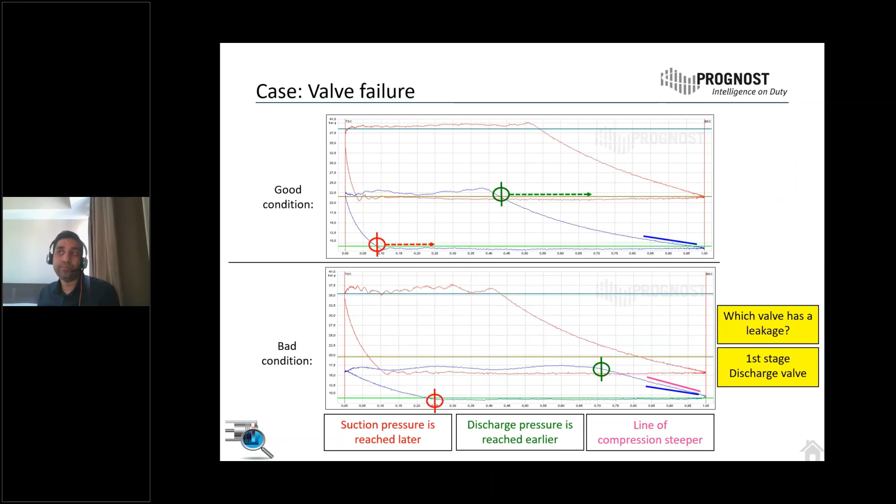I'm sure this was a very quick and fast presentation because of the time we had, but we can do another, bigger session to explain all of this in detail. Just reach out to Andrew or to me. You may get my email address from Andrew, but we are providing all these services.

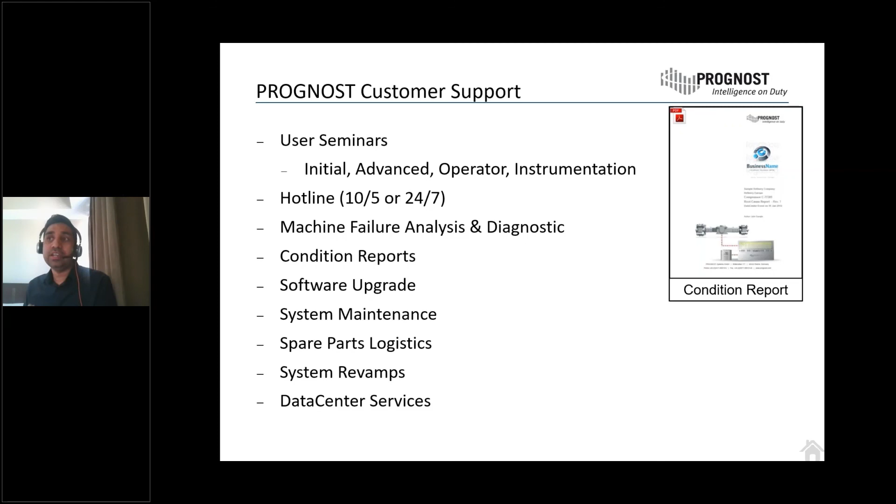Yeah, an hour definitely doesn't cover it for sure. I mean, that was a great presentation, great insight. I learned a lot for sure, because reciprocating is definitely different than centrifugal.

So we did have one question. One question here from Christian Rafael Garcia from Total in Rio de Janeiro. He asked about ultrasound for detecting issues with the valve. Is that something you can implement?

Yes, you can do this ultrasound testing. I think people do it, they take portable devices and do the ultrasound, but we are not actually doing that. Definitely, I think this is one of the technologies typically used for acoustic analysis and valve testing. Sure, but we are not doing that.

Okay, something not in your Prognost system. No. Okay, fair enough. Yeah, anyways, the polls, I mean, we could have, we just didn't have time for that.